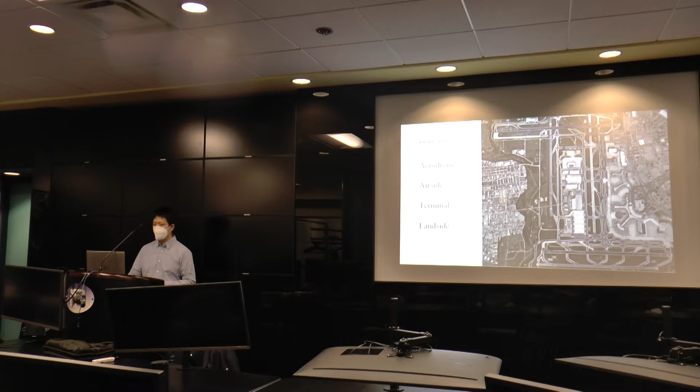So what our group does is we focus a lot on the terminal, and we touch up a little bit on the airside. To give you more background about the group in Toronto, and Arup in general, Arup is an international firm.

We have offices in pretty much every major city in the world. The headquarters is in London, but right now we have about 16,000 employees around the world, and on the map you can see all the offices.

Within Arup, the aviation team is a specialized team that does planning and engineering for airports. There are three major hubs: one is in Toronto, and then we have two others in London and Hong Kong, along with a few satellite offices where there are about 2 or 3 employees who specialize or have experience in airport planning.

On the grand scheme of things, the Toronto office is one of the biggest in terms of aviation expertise, and we are basically one of the hubs of excellence for aviation.

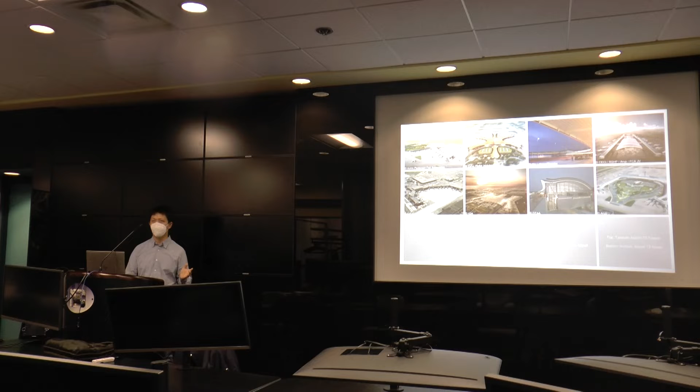Because of that, the Toronto office, the team I'm here to represent, has worked on some of the most prestigious airport projects in the world. Just in the last few years, we've touched upon airports in the Middle East, Asia, and many major airports in the U.S. and Canada, including Pearson, Billy Bishop, and the three airports in New York including JFK. On the West Coast, we've touched upon LA, San Francisco, Seattle, Portland, and the likes as well.

Because of that exposure to so many airports in the world, our group has repeated expertise in building simulation models and doing the analysis, so we can be efficient at that. This really creates a critical mass of employees who do this work, making a snowballing effect for it to keep going. So what exactly is it that we do?

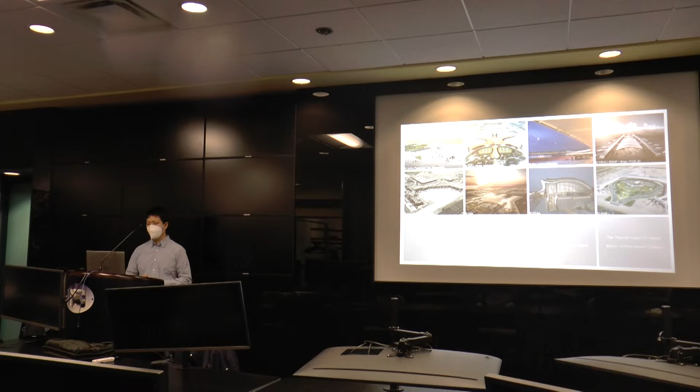We basically analyze the different components of passenger processing facilities within a terminal building. This ranges from check-in to departure security, inbound, outbound immigration, baggage reclaim, so these are the main things that we see as a traveler. We also look at aircraft gate allocation and airline assignment, and airline allocation strategies for an airport.

We do this with a few tools. We use Excel a lot, and other than that we use industry-specific tools such as CAS or NAPA. These are what we use to allocate aircraft to gates. And we use simulation tools, so discrete event simulation, to look at how queues form and dissipate within an airport. Operations research is something that can relate to that.

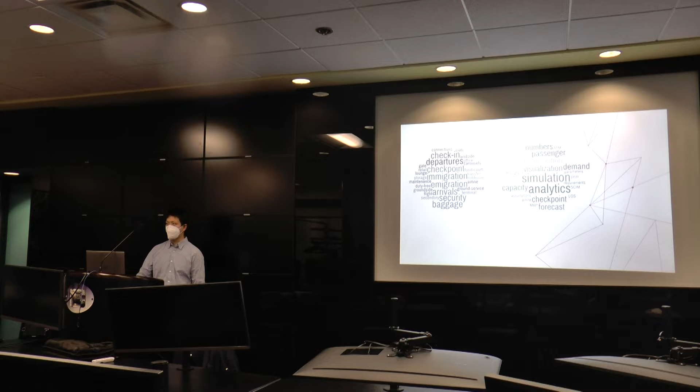And then we also look at pedestrian simulation, pedestrian microsimulation. So we use MassMotion a lot. I think there's some exposure to this in this program to MassMotion. I think Eric Miller's course has a little bit of that going on, and there's that great collaboration between UT and Arup on that front as well.

We can pretty much group all of our tasks into 5 main categories: aircraft gating, processor capacity, schedule analysis, passenger flow, and visualization. All of these make up the portfolio of the work that we do for clients, and we can basically do these tasks at any point of a project.

When you think about an airport development project, either it's a greenfield airport, so a brand new terminal building or brand new airport, versus an airport expansion project, like Pearson thinking about a new pier, or an airport thinking about a new terminal or extending one pier, our work can come into any point of an airport's life cycle. Especially because if an airport is thinking about a new extension or pier, that means more passengers are going to go through the airport, and all of those passengers have to be processed by processor facilities.

And if an airline is thinking about a different kind of operation at the airport, so if an airline wants to focus more on transfer passengers, that also means a difference in demand on the processor facilities. And recently with COVID, there's been all that change in passenger patterns as well. So even as an airport is decreasing in traffic, or if they have to implement social distancing, it also means there's going to be a different capacity that the building can handle.

So again, there are two types of simulation that we use in the group. One is discrete event simulation, which comes from operations research. We look at passenger processing, queuing, and waiting, the level of service in terms of wait times, and we call these numerical results, because the results show up in tables, and we present to the client: these are your wait times. The other one is the passenger flow simulation, which is done in MassMotion. This is like corridor space programming, geometric analysis, and anything to do with that.

And that is a graphical result, and so that shows up in videos, and we show heat maps to the client, and we take them through what these design decisions might mean for passenger flows at the airport.

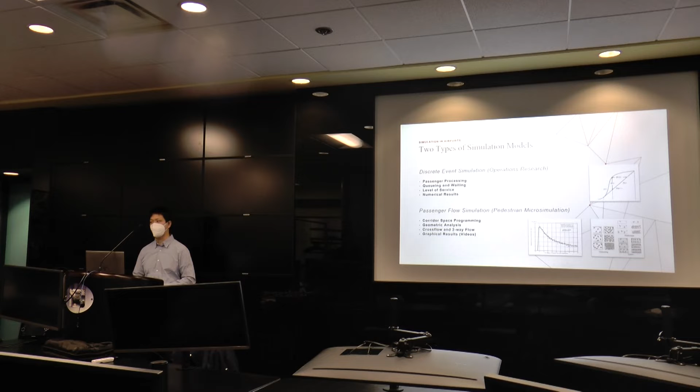And just like every kind of modeling that's done, we need to look at the demand input, then we look at the processor facility, and on the output side is the level of service.

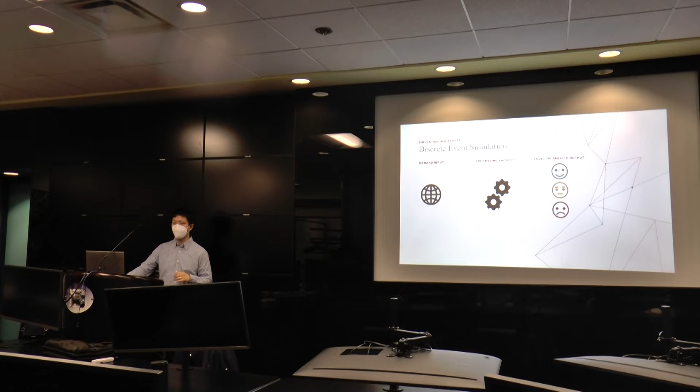So the demand is really where things get a little bit different from the general transportation modeling side. With traffic simulation, we have our favorite 4-step model, which starts with trip generation, trip distribution, mode split, and traffic assignment. In the world of traffic analysis, the demand is really nebulous. We think people want to go from one part of the city to another. We have some survey data from Transportation Tomorrow or other data sources, but we're not really sure.

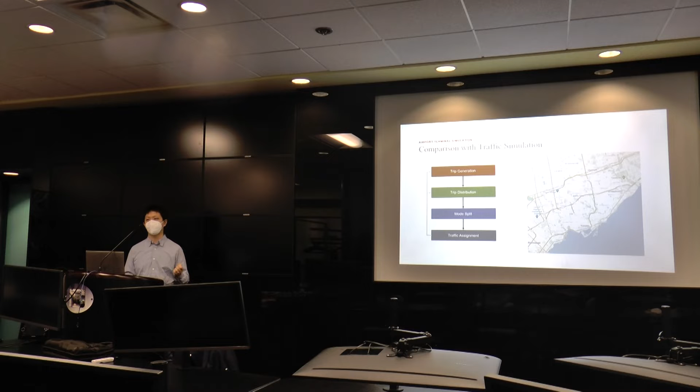We don't know. But in airport and aviation, this is more concrete in a sense that airlines and airports have agreed on a flight schedule. Tickets are sold many months in advance, so we know what's going to happen at the airport in terms of demand to some extent. For example, Pearson has a daily flight schedule already figured out - what flight is coming, what flight might be delayed, what flight is a little early.

And after that, we also have a good understanding of what a passenger does in a building. So we know certain percentages of passengers want to check in at a desk. Certain passengers are happy going to check in at a kiosk. Certain passengers can check in online. So all of that information is available to airlines. And if our client is an airline, they will have that information in very disaggregate or aggregate data that we can rely on.

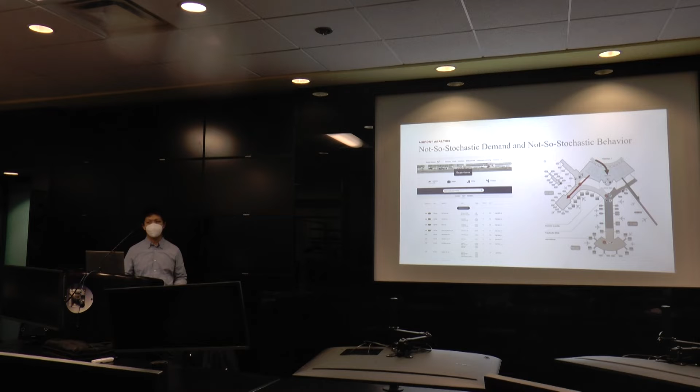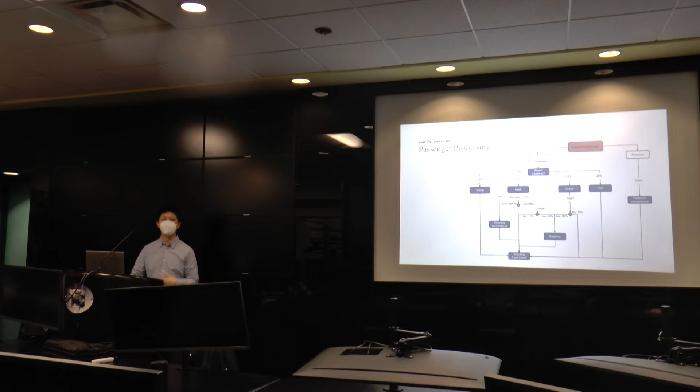So all of this, in terms of demand, we have a good concrete source of data for that. And with that as well, we have a good processing flow through the building. So we know what the splits are, what type of passengers can go through fast track security, what types of passport they're using, so they can go to different immigration lanes. In aviation, it is very fortunate that we do get to work with this kind of data, and this makes our model a bit more robust, and we can rely on the results a bit better.

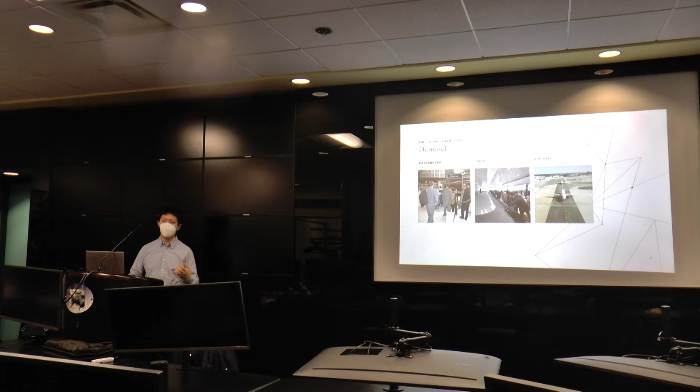So other than passengers, we have bags and aircraft demand. Again, the similar idea comes in that sense. So we kind of know how many bags each passenger is checking, where the bag needs to go, and same thing for aircraft. Barring any major delays due to weather patterns or anything major like that, we have a good idea of when the aircraft is coming, so we can put these aircraft on the gates to process them.

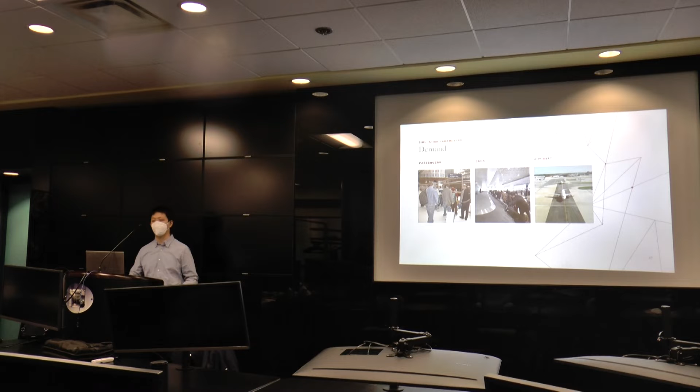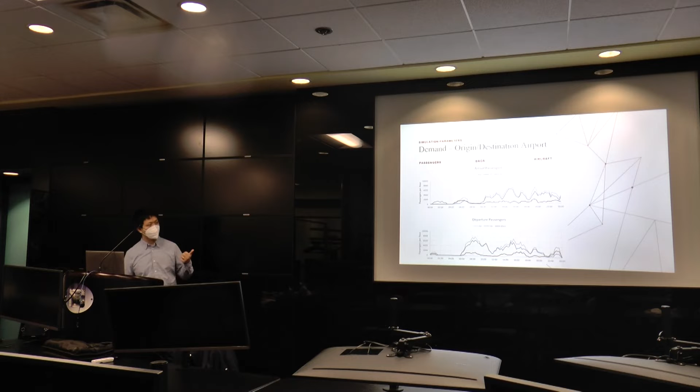So one very standard way for us to represent demand at an airport is with an hourly throughput or hourly demand graph. This one is a typical airport with lots of origin-destination passengers - we shorten this to OD, like an OD matrix, but it's not really an OD matrix. An origin-destination passenger is basically someone that enters the city or leaves from the city, as opposed to a transfer passenger where you connect from one flight and depart from another flight.

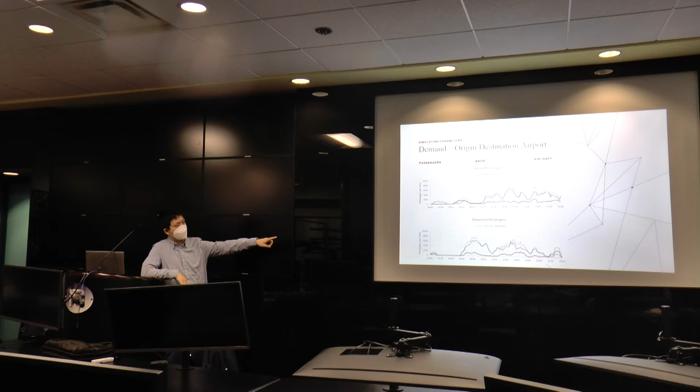So airports that want to cater to either predominantly OD demand versus transfer demand have to be designed a little bit differently. This one you can tell it's OD, not just because the blue line is very high showing a lot of OD, but you can also see from the pattern at this airport that it's an OD airport. One thing that gives that away is there's a major departure peak in the morning, and basically no departures late at night because there are curfews that have to be followed in most cities. When an aircraft takes off, it's really loud for the neighborhood, so if you live in Mississauga, you probably experience that. So that major peak in the morning represents that morning rush to get out of the city.

So these flights are most likely short-haul flights to neighboring cities. If it's in the U.S., it's probably a flight from New York to Boston or New York to Washington. Business people fly out in the morning to have their meetings later in the day. That's also when pilots wake up and can start working, so a lot of airlines want their pilots and planes off the ground as soon as possible. A plane that's flying makes money; a plane sitting costs them money and doesn't do anything. So that's one way you can tell this is a major O&D hub, or an origin-destination airport.

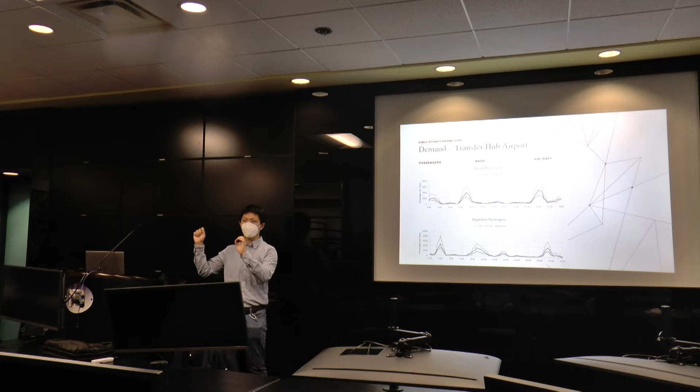Another interesting thing is you can notice there's barely any departures starting mid-morning, because in the Middle East it's really hot. Those airlines operate very large planes to feed that transfer hub, because as a transfer hub, you can take demand from feeder cities that don't have to be major cities anymore — everybody's coming into your hub and then going back out. So if you have two smaller cities in Europe and Asia without enough demand for a direct flight, there's enough demand from each small city to your hub, and then people who want to go to any other part of Europe or Africa can go through the Middle East as a transfer hub.

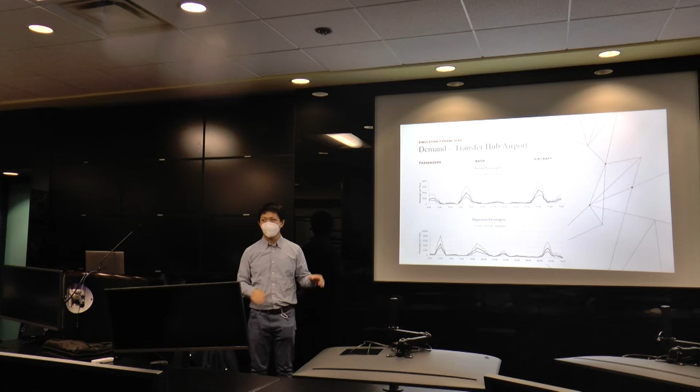Since that's the case, you can fly pretty heavy planes fully loaded with passengers — there's lots of demand there. These big planes take a lot of runway to take off, and as it gets hotter, the air gets less dense, which creates less lift. So for that reason, we don't really have a lot of departures when it's hot. Instead they have this really big midnight peak, and that's one of the ways that in that part of the world you can bypass curfew laws — we can be loud at midnight, because otherwise we're not doing any business.

So that's an interesting part of aviation that I learned after a couple of years.

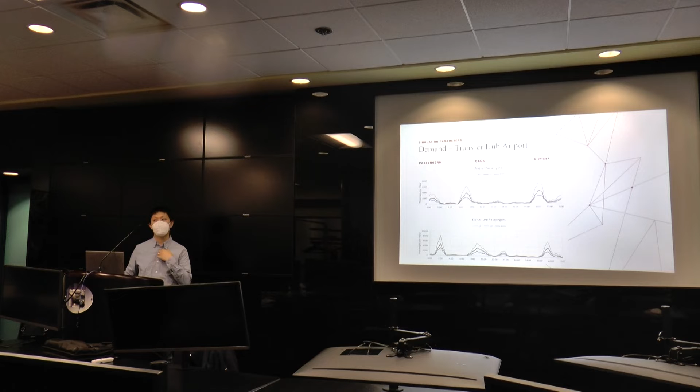With all these demand patterns at an airport, passengers have something called show-up profiles. A lot of airlines have data on when their passengers show up to the airport for a flight. If I have a flight at 10 a.m., I have a choice — do I want to go at 7 a.m. or 8 a.m.? That's like a 2 to 3 hour show-up profile. But if I have a flight at 8 a.m., technically I have a choice — do I want to go to the airport at 5 a.m. or 6 a.m.? But I really don't have a choice; I don't want to go to the airport at 5 a.m.

So for that same reason, if your flight departs early in the day, your show-up profile is more compressed. If your flight is really early, you're just going to put up with the fact that you'll be a bit rushed at the airport. You'll just get some sleep and then get on with your day.

But if my flight is like 2 or 3 p.m., or if my flight's at 6 p.m. and my hotel kicks me out at noon, then I'm going to have a 5-hour show-up profile at the airport, unless I find something else to do in the city.

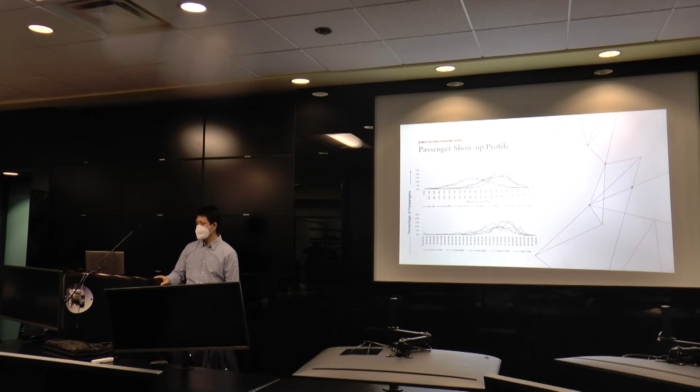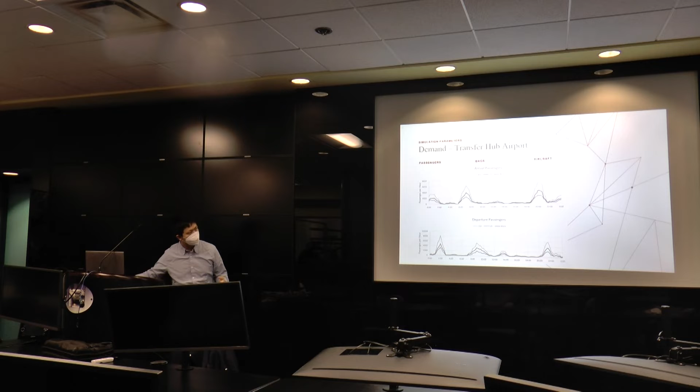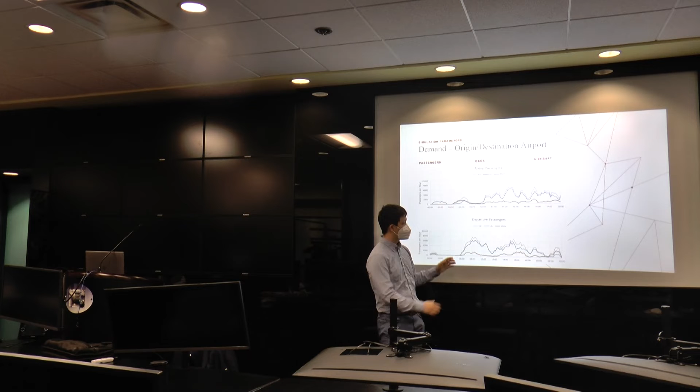And because of that as well, if we apply the show-up profile to the various passengers, especially during the morning peak, the passengers between 6 to 7 are going to show up at around 5-ish. The passengers at 7 to 8 might also show up at 5. And the passengers at 9 to 10 are probably going to show up at 6 or 7. So we have that compression of demand of passengers relative to the flights in the mornings.

And that really makes the morning peak even worse than what this graph shows. If we're using classical ways to do airport analysis and facility planning, we won't see that. But once we get into simulation and really apply a show-up profile to different kinds of passengers in the morning at different time frames, that can really get you that behavior, and then you can plan your building accordingly.

So again, a lot of our clients would have been tripped up by this fact. They would do their back-of-hand calculation and see, oh, this doesn't work, this doesn't make sense. And then we had to show them, well, this is because you have different show-up profiles in the morning. That's something that really drives home the point to a lot of clients.

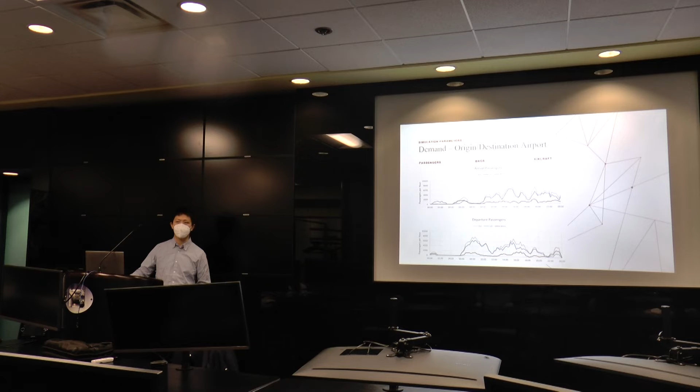So after our passengers show up at the airport, they go through all kinds of processes. Some of them check in differently. Someone that's really savvy with flying will do mobile check-in, and once they do that, they get their boarding pass on their phone, and then they go drop their bags.

Some people might go to a kiosk. The kiosk might say, okay excellent, here's your boarding card, or the kiosk might say, I don't know who you are, you need to talk to a person. So we have all kinds of data on what kind of experience a passenger might have, broken down into percentages. And then we apply that to the passenger and put them through the building. This is where our numerical simulation, or discrete event simulation, comes in.

So this is a tool called Simio that we use. I think the industrial engineering program might have a bit of touch on that tool. Basically everything here is a black box, so everything that the operations research prof tells you, we kind of put it in here.

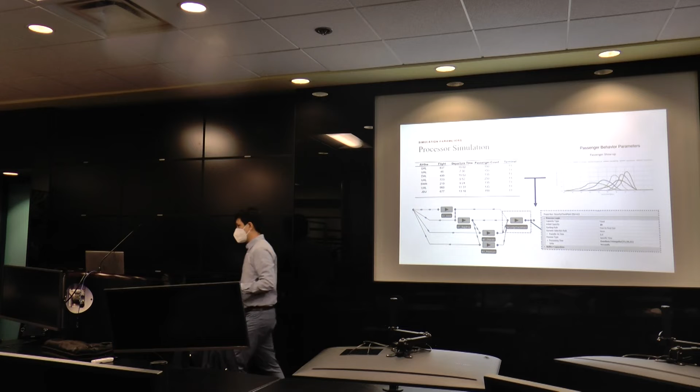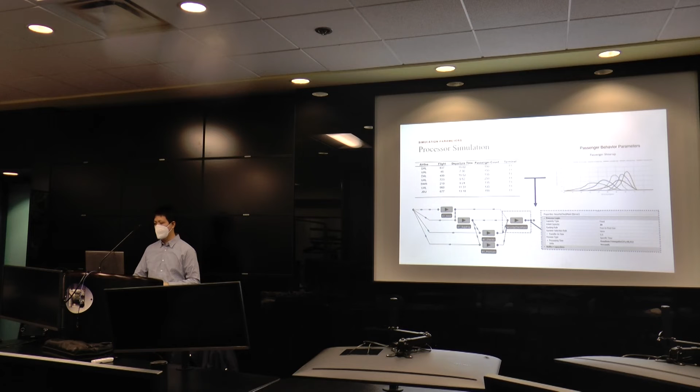And we can say this process has 20 servers and they follow some kind of distribution in terms of processing rates, and then Simio will end up spitting out what queues we're getting and how many passengers we get in that queue. This is an example of what a Simio model might look like.

This is Montreal, I think I can say that, that's not confidential. We have Air Canada, other domestic airlines, and then these are international airlines that kind of go around.

In Simio, everybody's walking on the line, so they don't know that they're bumping into their friends or their enemies, and they don't know that they're bumping into walls either. So what we really do is we have passengers show up at the curb, and there's some semblance of how long it takes for them to walk somewhere, but in most cases it's a pretty big approximation on the walking times. Then the passengers get to a server, we say — these things are servers — and then they do their operations to go through check-in and security.

After that, we take our output from Simio. Simio will tell us your wait time is this much at these processors, your queues are this much. We compare it against the international standard.

This is the Airport Development Reference Manual, which everybody in the world uses to plan their airports. Those of you taking the airport planning and engineering course might see some of this. At different parts of the airport, you have different standards for passengers.

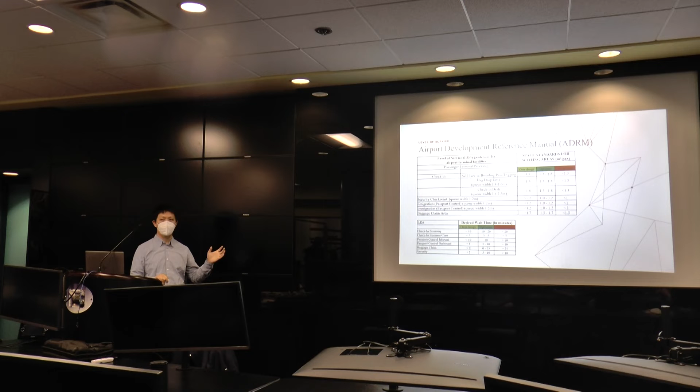If you're checking in, you want some kind of wait time target. If you're full service, it's slightly problematic because you have to talk to an agent, so we allow you to wait up to 15 minutes before you see an agent. If you want to go through a kiosk, we want to cater to that and make it a faster experience. So we're designing check-in lobbies to have shorter wait times for that kind of passenger.

Depending on which part of the airport you're in, you may or may not have your checked luggage. If you have checked luggage, you occupy a bigger space, and once you've dropped it, you're a bit more mobile. So all of that is here, and we take our outputs from our numerical simulation software and compare it against these standards to see how the building is doing.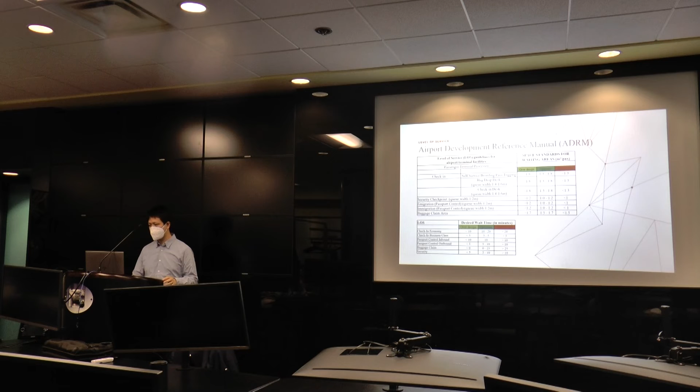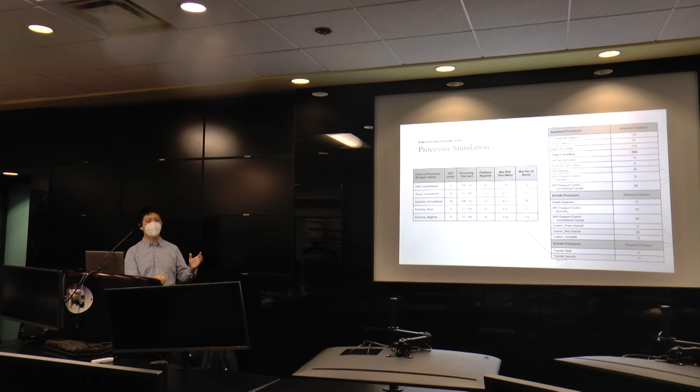So then we determine the positions required, the queue spaces required, and we give that information to the architects. At this point, the architects are really planners for the building, and that's another distinction between the group I represent and the group I'd call the architects.

We do all the mathematics behind it. We run all the simulations, prepare the reports, and give that requirement to the planners. They're the ones who figure out, I need 20 lanes, I need to put them in the building somewhere. It's a different set of skills, and there's a different group that does that.

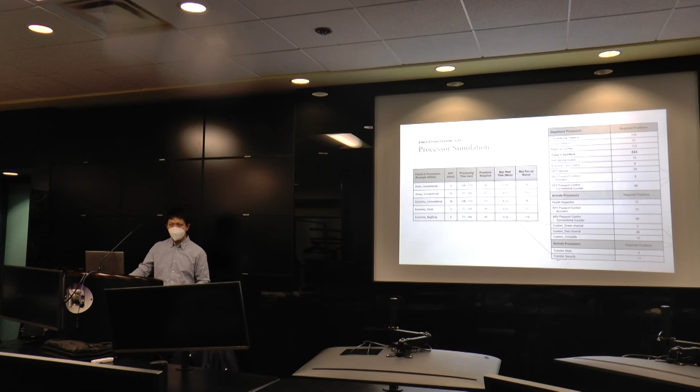One example I can talk about is the Taiwan airport, Taoyuan Airport Terminal 3. It's a 500,000 square meter building. This development is what the project is looking at, and this building is going to handle 45 million passengers per year by the time it's complete. As a comparison, the two terminals at Pearson combine for 50 million passengers per year.

So this building is 90% of Pearson, and the other two terminals are going to handle another 40 million passengers. So when this is all said and done, there's going to be 80-something million passengers going through that per year.

For that project, we did the numerical simulation, figured out what they needed, and fed that information back to the planners. The planners and architects worked together and updated the building footprint and different parts of the building to accommodate the requirements. After that, they feed back a new design or new set of floor plans to us, and we take those plans and put together the passenger flow simulation, or the MassMotion model.

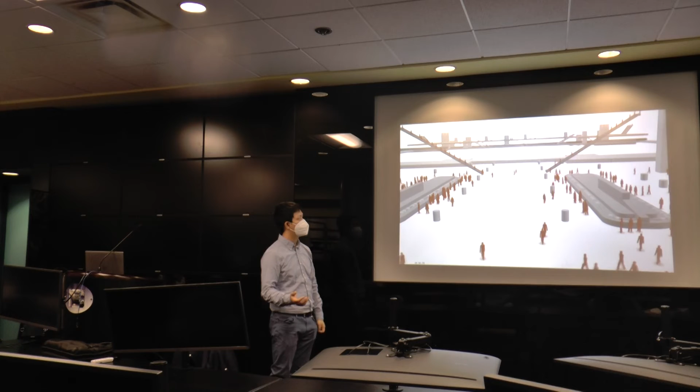We have a simulation on how long a passenger needs to wait for their bags. Here's where we visualize that, showing what each area of the airport might look like and how crowded it gets. Here is the land side where they meet their families and friends, the greeters. We compile these videos and show the client how their airport is doing.

Along with the report, we show level of service heat maps in various parts of the airport, identifying any points where the level of service gets too low. In airports, we generally aim for level of service C, or sometimes accept D, and we know A and B are really above and beyond. Only a few airports in the world claim to strive for A and B, while all airports are at least going for C.

With all of this information, we can also inform other design decisions in the airport. One is hold room occupancy, how big we need to build the hold rooms, how many chairs we need to put in there. With any kind of occupancy or accumulation information, we can also inform the heating and cooling department, the mechanical engineers sizing the AC or HVAC, ventilation and air circulation.

We can also inform decisions on fire escape, what we can anticipate as total or maximum accumulation throughout the day. Then they can size the egress staircases to allow all passengers and staff to leave within a minute in case there's an emergency.

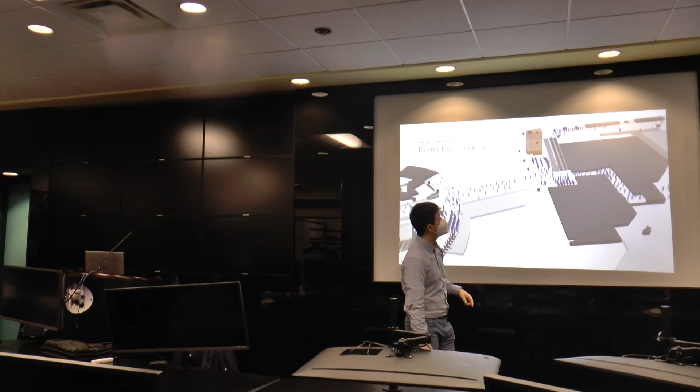Another example is where we dive down quite deep into result interpretation. These are immigration kiosks at an airport in Europe, and the initial plan was to have just this many kiosks. We went over it with the client, agreed on all the parameters, got all the data we needed, and put together the model. We found out that this is nowhere near enough.

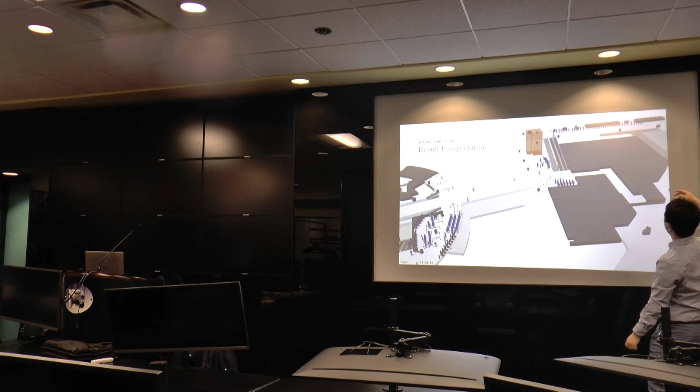We need to put more here, and then queuing becomes a problem, so we needed relief queues here. Then the client said, okay, what if we put queuing up there? The problem is you also have a big flow of passengers coming in here, so if your peak is happening from this flow, they're not going to be able to see that queue. You'd have to direct them upstairs to go to that queue, which is a terrible experience. We told them this is a terrible experience, and they said fine, we'll add on even more. I think that's where they put in this queue here.

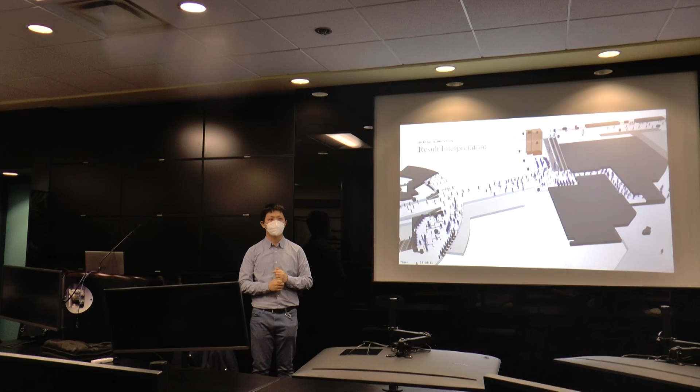Question: what's the difference between the blue and the gray people here? When this simulation started up, I saw a bunch of gray people going straight through, and the blue people were waiting. Is it like passport differences or something? That's exactly it. The gray people were people with EU passports, the blue people are other people. Okay, so they're like, oh, welcome home. It's like a Canadian going into Pearson versus someone else. Yeah, that's exactly it.

So in all of our modeling, we have to differentiate what kind of passengers these are, what passport types, and what they're eligible for versus another. You have to have that distinction. In the previous video too, departure passengers can have different types of check-in and security, and arrival passengers, whether transferring or holding a Taiwan passport or anything else like that.

So being cognizant of time, I'm going to go through this really quickly. Heat map.

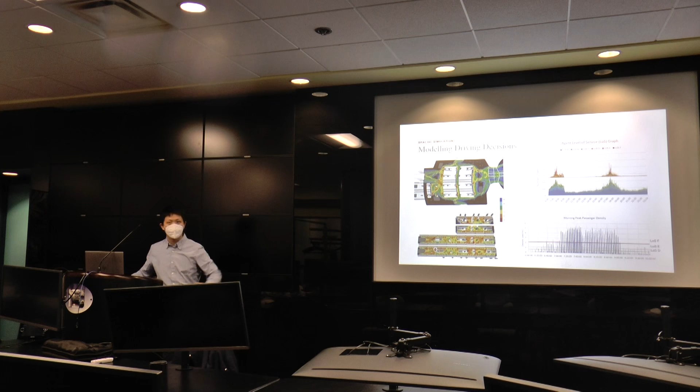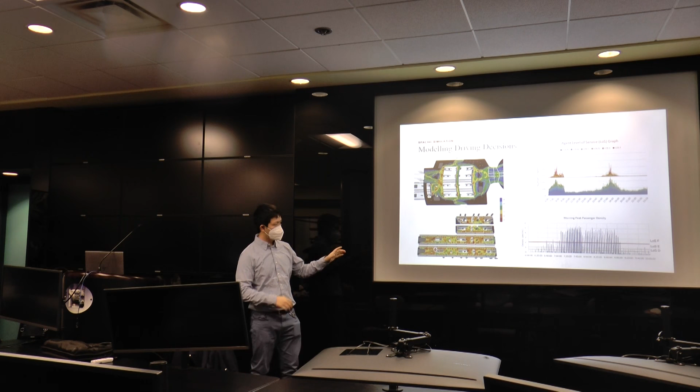So this is a rail station in front of an airport, and we got 4 different lines out here, and our client really wanted to see an overall heat map of the area, and then they saw all these reds. They're like, oh my god, my station is terrible.

So we have to also kind of be a bit reassuring at points, and tell them what's happening here. As the train door opens and you have a full train, everybody's coming out, and at the same time you have people on the platform. So your demand on the platform is really, really high, and that's shown by all these spikes every time a train door opens. So your density goes really, really up to LOS F.

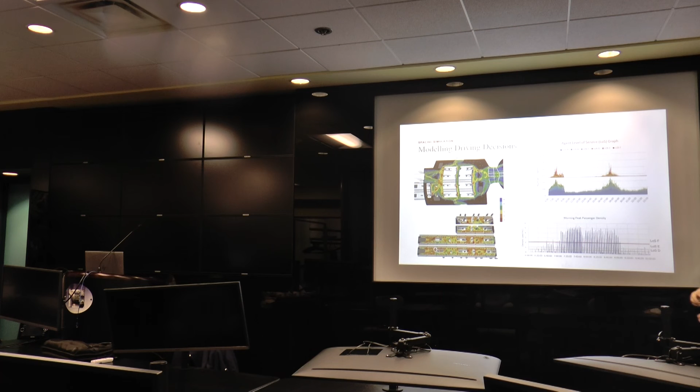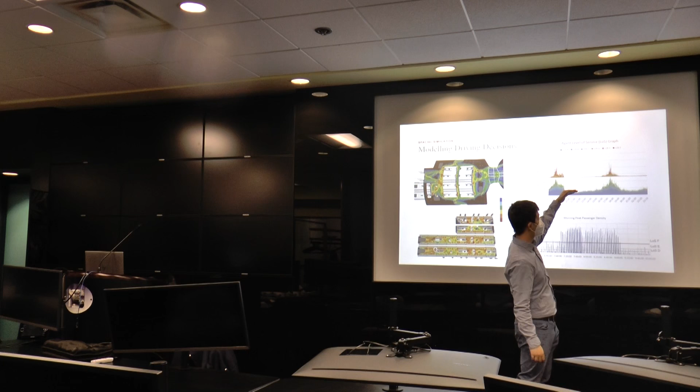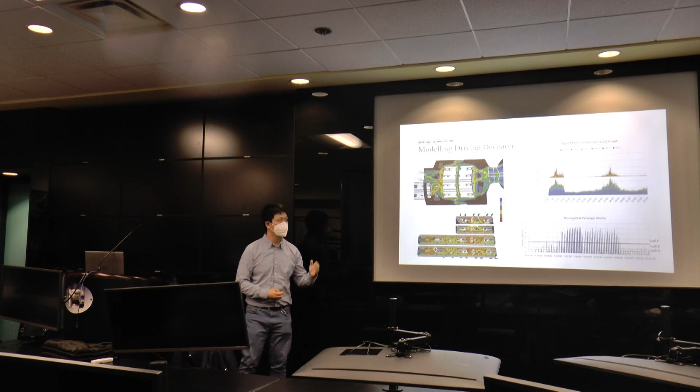So we have to tell the client that, look, this is okay. It'll pass. It only happens for 20 minutes during the peak hour. And then we show what happens during the day is most of your passengers are in the blue to green, which represents level of service C, and very few people get into D, E, and F. But your peak hours are the ones where you have a bit of a challenge. And if you design to the peak hour, to get to C for the peak hour, you're really oversizing the facility. You gotta double your budgets for that. So then they have to make that decision whether or not they want to do that.

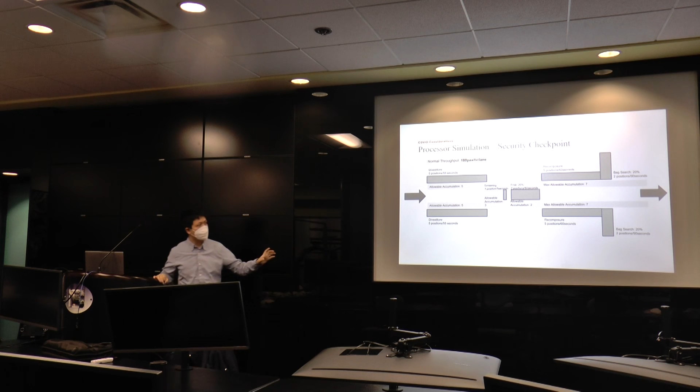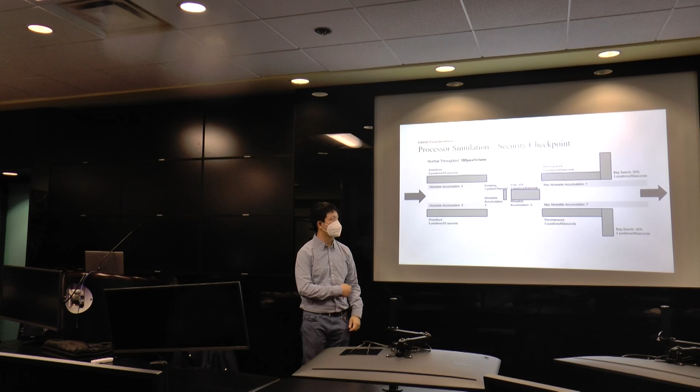As we're doing security, normally you can allow 5 people to open their bags and divest their things to go on the X-ray, and then here you can allow 2 or 3 people to accumulate before they go through the metal detector. And then here there's some certain percentage of chance that you'll set off the metal detector and someone's going to have to scan you, make sure you're okay. So there's all kinds of accumulation that you can allow here, and also accumulation as they're repacking their bags.

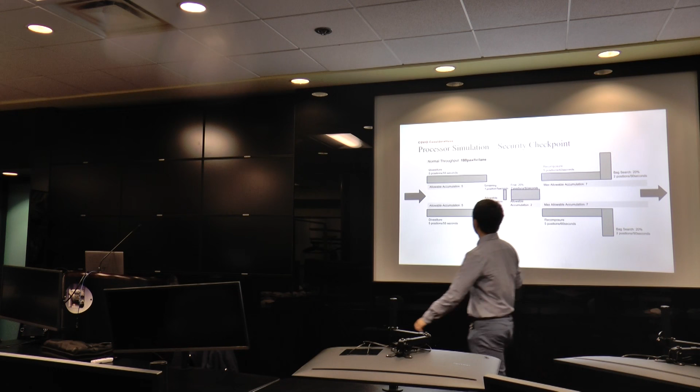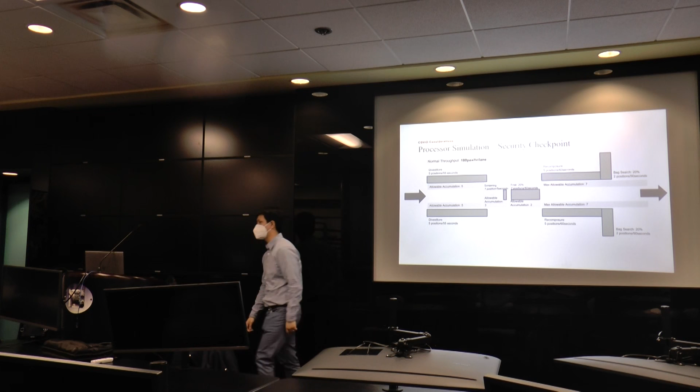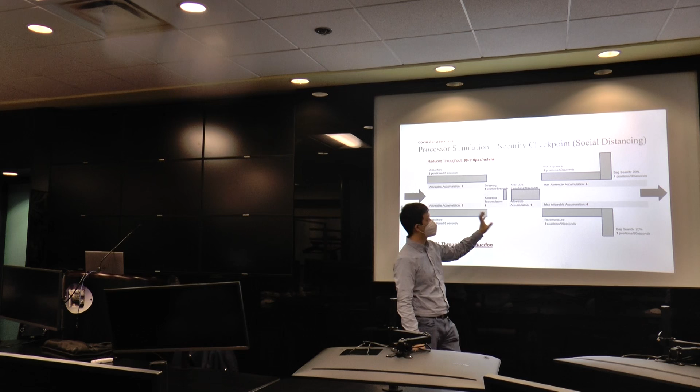So this is under normal circumstances, and within that numerical model, Simio, we can tell that this throughput will get you 180 passengers per lane per hour. But as you have to do social distancing, all of a sudden your 5 positions become 3, and your 2 positions become 1, and you have to space people apart, so your throughput also drops. So all of a sudden fewer people can divest at the same time, and we can see a 40 to 50% throughput reduction.

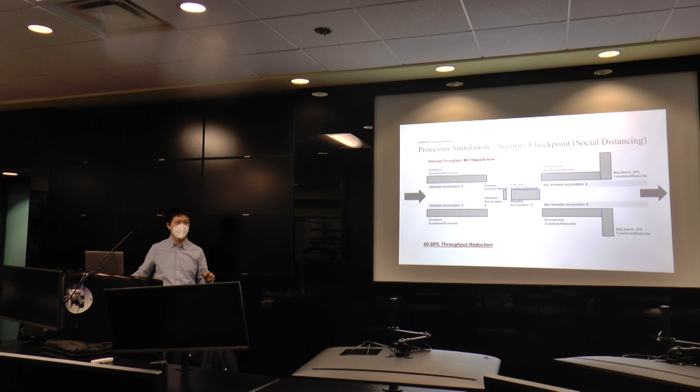And a lot of our clients really want to see why that is, and they can see that as well. And then lastly, we have limitations to everything. All models are wrong, some are useful. So if we have garbage information in, it's going to be garbage information out.

And a lot of this is data intensive. Anybody who's worked on MassMotion here probably knows that when you run a MassMotion model, you generate a huge database, and then you have to store that database somewhere and read it. Same thing with our Simio or the numerical model. And then you have to interpret it to the client.

If it's just red and you say nothing, you're going to freak them out. So you have to tell them a little bit about why this is not a problem. And that's really why, as engineers, you get paid the big money, or big-ish, to interpret the data, because otherwise we're all going to be replaced by AI.

And that's really my closing point at this point. So again, thanks everybody for your time today, and I'm open for questions.